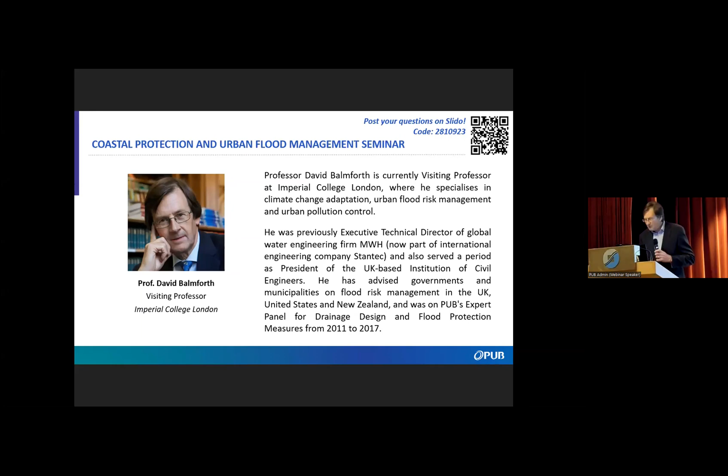I'm going to talk about a completely different area now, which is looking at the places that we live and work, and actually looking at the consequences of flooding when floods occur. I just wanted to start with the 2021 floods in London. Now, you may ask the question, given the fact that we've got a huge barrier on the Thames and a load of flood defence walls, why have we got flooding? Why have we had 3 severe flooding events in 2021? People evacuated from their homes, multiple roads and underground stations closed.

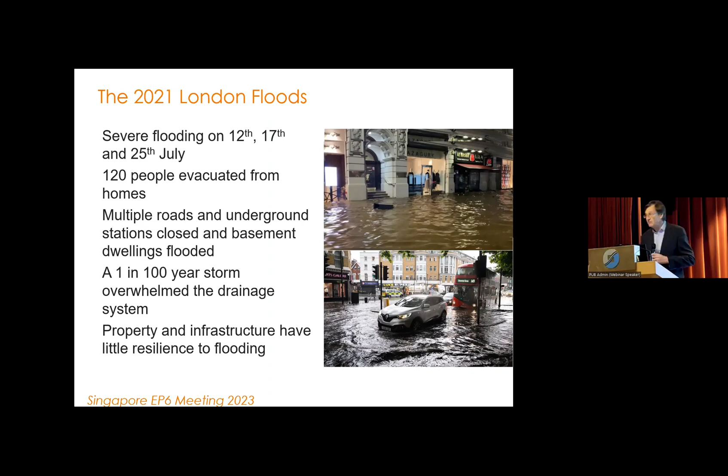And it's because, to some extent, we've been looking the wrong way. And the thing you have to remember is not only do we get flooding from the sea, we also get flooding inland from rivers and drainage systems, and often these two things occur together. In many, many cities, there's a strong correlation between storm surge at the coast and the back up through the estuaries and overloading and flooding from our rivers and drainage systems because it rains heavily at the same time. This was a 100-year event.

And if we just translate that and upscale that for UK, this is some IPCC projections and what it means for flooding in the UK. So at the moment, for all flooding events, we've got probably about 2.8 million properties at risk of flooding. Those are the residential properties, and a further 1.1 million business premises. Now, impacts of flooding can have a lifetime effect on individual people and where they live, and it can put businesses out of business. So it's really, really important, especially for more severe events.

So the next 2 rows are about residential properties that are at risk from severe flooding, and those non-residential industrial properties that are also at risk from severe flooding. And then we've added on some railway stations, lengths of roads, schools, the hospitals. And I just want you to look at the figures on the right-hand side to give you an idea of the scale of the challenge that we face with climate change. Some of the increases, the percentage increases there of flood risk and flood damage are actually quite frightening. And we have to find a way of dealing with this.

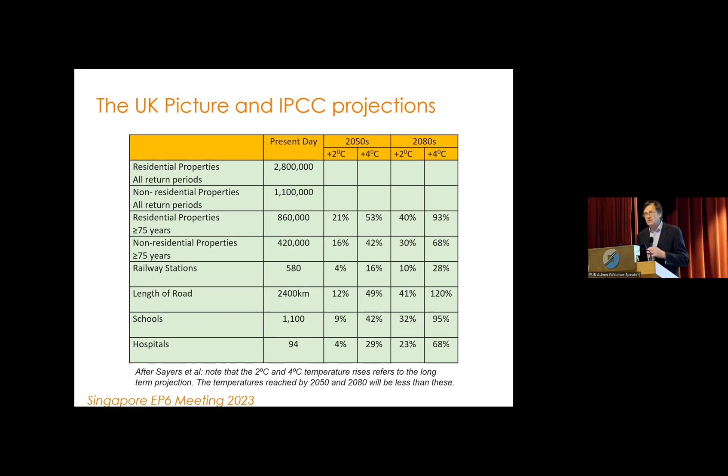Now, we've seen some examples of how we might tackle this risk on the coastal side. And I want to talk about my role in this panel, which is talking about inland flooding, which will be occurring potentially at the same time, and we also have to deal with. And many of you listening today and here in the audience in this building will have some experience of flood risk management, I'm sure, and you'll be familiar with the concept of the source, pathway, receptor approach to managing flood risk. I've just put an example of that up on the picture here in relation to a drainage system, but you could draw exactly the same picture for rivers, exactly the same picture for coastal defences.

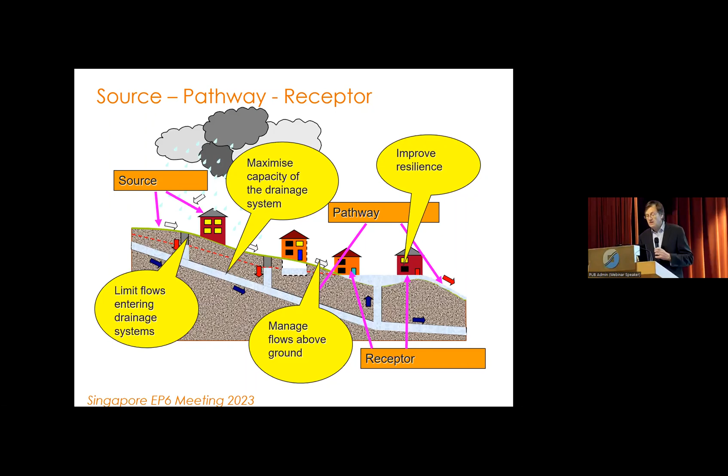But it's really this little bit on the right-hand side, which I hope will work if I press the button. It's that little bit that I want to talk about today. The resilience of the receptor, the resilience of our properties, the places we live and work in, to flooding. Now, we know that we can make these buildings and premises more resilient to floods, that we can attempt to keep floods out and prevent damage so we can continue to live and work in them when floods occur.

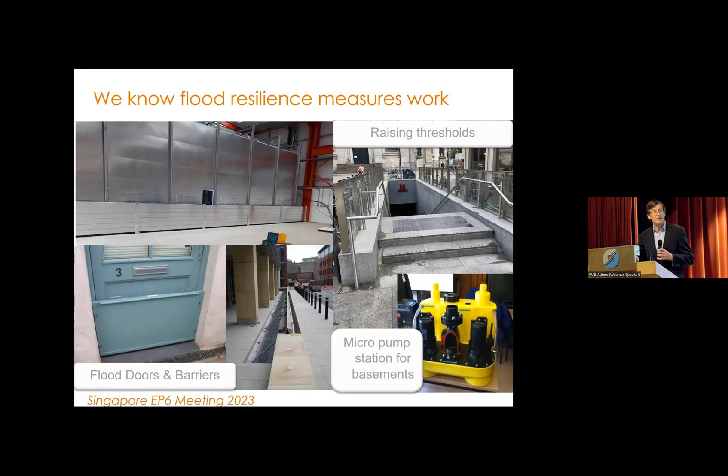We have equipment and products available in the marketplace to provide barriers and flood doors, to provide pumping stations to deal with basement flooding, and also we can raise thresholds generally both on new properties and existing infrastructure and properties to deal with this issue. So we ought to think that we have a great opportunity here to manage flood risk in a different way by making our properties more resilient to flooding.

Because these properties are very susceptible to flooding. They're built from bricks, timber, plasterwork. All of that requires ripping out as it gets damaged during floods and replaced.

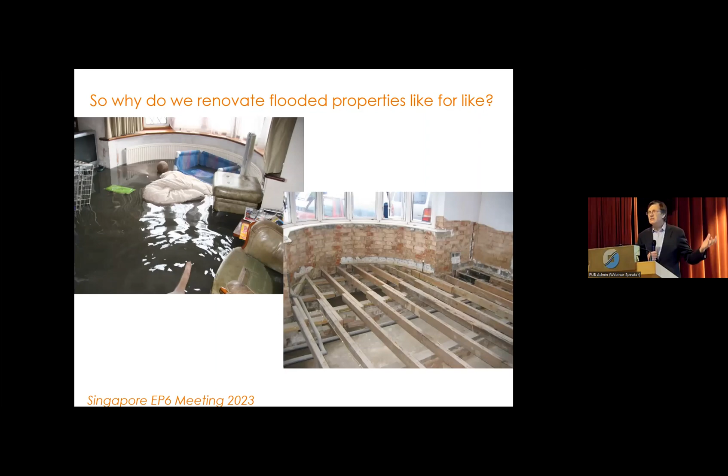We're talking here about people, their lives. We're talking about businesses, business continuity. And it just seemed to me to be crazy that we just reinstated this building exactly the same as it was before. Why is that?

So I started to look into this, and I did a program for BBC television on this topic. And in doing that, one of the places I went to was a property in South London, occupied by a lady called Mary. Now, when I was asked to do this, I imagined Mary was an elderly, frail lady who'd lived in a house and suffered from flooding. She actually turned out to be an ex-policewoman, middle-aged, and actually she looked like an ex-policewoman, and largely she behaved like an ex-policewoman, or how you might imagine a person like that might behave.

Now, her house had been flooded twice. So she decided she was fed up with this, so she would invest some of her savings, a lot of her savings, on putting in flood resilience measures. I visited her after the third time that her house had been flooded. And you can see the damage here. You can see things that have been ripped out. You can see it being dried out.

And when she described her experience with me, this rather tough lady was in tears. She cried while she talked to me about her experience of being flooded. She had spent a lot of her savings to no effect. And I began to realize that the way we were approaching flood risk management, particularly on the resilience side, was not the way that we should be doing it. We weren't dealing with property flood resilience properly.

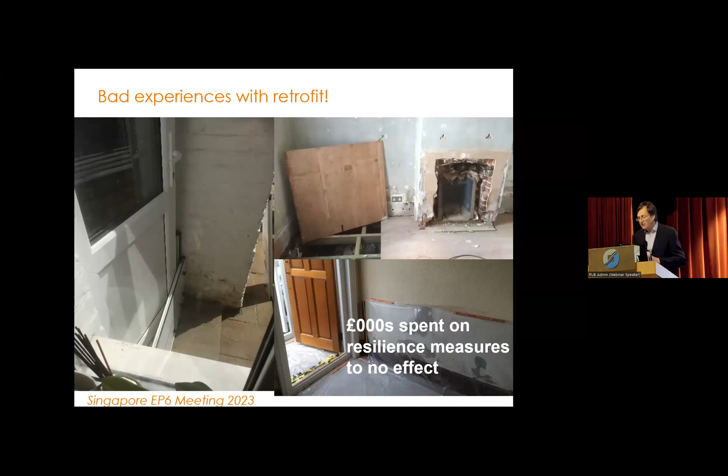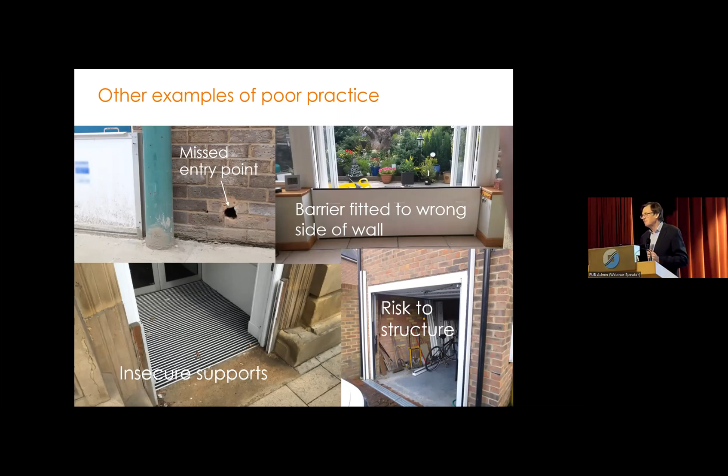Also, when we're flooding, property owners go to their insurance companies, they pay out, the property gets reinstated, but it gets reinstated like for like. Insurers would not pay for betterment. Now, this seems crazy, doesn't it? Because the next time it floods, presumably they're going to have to pay out again. But of course, they allow for that because the one thing you find with insurance companies is they're not keen on losing money. So they will just bump the premiums up. And what happens when we bump premiums up? A lot of people don't renew their insurance. So more people were suffering even more from flooding.

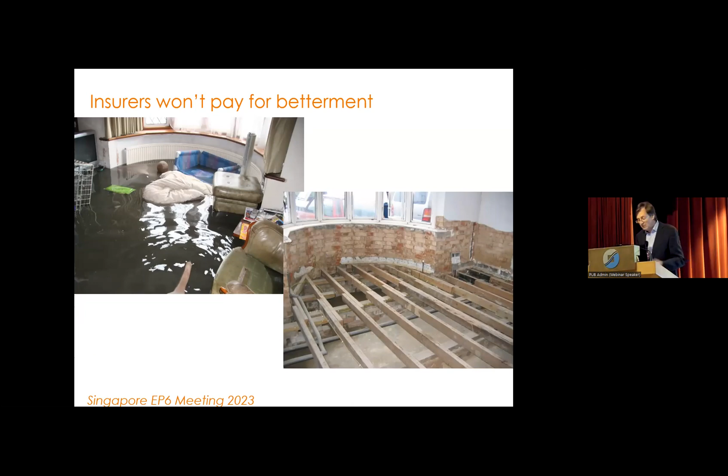Also, because making property flood resilient didn't have a good record, government weren't interested in investing in it. They didn't want to put their money into something that wasn't going to work. It had a bad reputation.

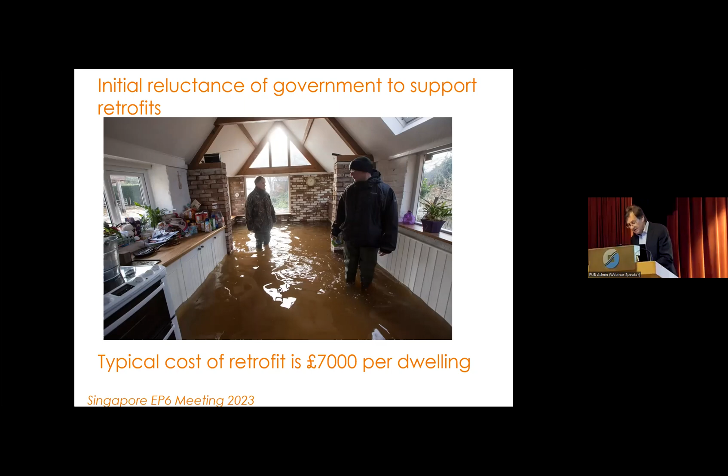And I was told that by our Minister of the Environment at the time, who told me in no uncertain terms during a flooding event, and he was under lots of pressure actually during this flooding event, but he said, please don't talk to me about property flood resilience, I think was his reaction. So I didn't. I went and did something else. I went actually and talked to some of my colleagues in the sector.

I said, come on, guys, please. When I use the term guys, I'm not being gender specific. I'll just be clear on that, okay? All of you.

We got together, we had a bit of a huddle, we had a meeting. It's always good to have meetings, isn't it? It's an excuse for doing something positive, but we had to have a meeting, and we had the meeting.

We got government agencies, insurers, surveyors, contractors, product suppliers, and even some property owners and ordinary people from the street sitting around the table. What are we going to do about this?

We decided we had to establish what good practice looked like, because that was the only way we would then have a means of tackling bad practice. You can't tackle bad practice until you know what good practice looks like. What does good look like? That was our goal.

We had a project, paid for by the government, a research and development project. But actually, interestingly, the biggest financial contributor to this was the insurance sector. We got one of the major insurance companies to underwrite this. They said, get as much money as you can from government and we'll pay the rest.

So they did. Oh, I can see a big 10-minute sign come up at the back there. Just making sure you're giving me the right amount of time.

The first 3 meetings we had, we spent talking about what we meant by resilience in the first place. This was quite important because there's a lot of misconceptions, because resilience is not just about keeping the water out. It's also recognizing that water will get in, and could we perhaps use building materials and finishes and fittings that don't get destroyed when they get wet?

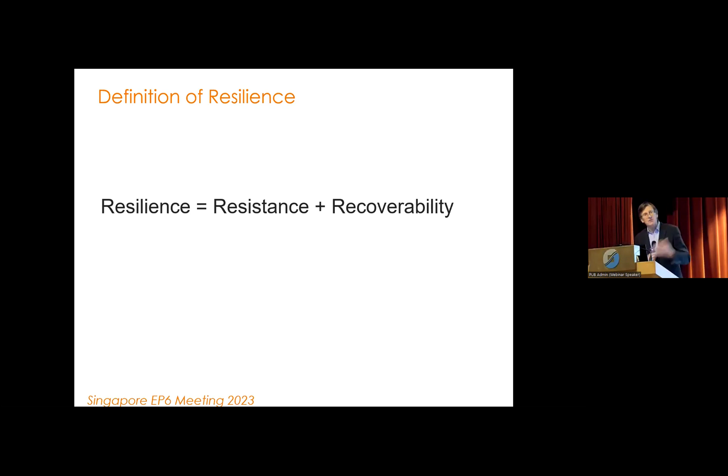They can actually recover. Because what you don't want is, if you have damage to property, you don't want it to take months to repair, because we need businesses to keep running and we need people to get back in their homes. So we developed a code of practice. It took a lot of work, 18 months solid work on this.

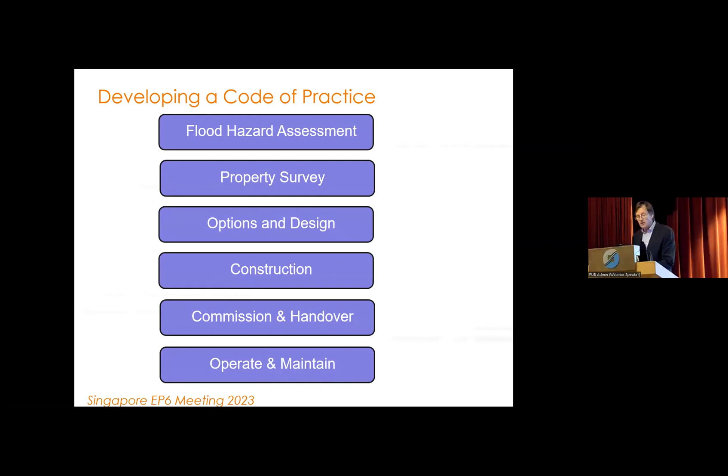These are the different elements. I just want to quickly run through what they look like. First of all, it's really important to find out where the floodwater comes from. It's not always obvious, so that was the first step. Where does the floodwater come from? Source, pathway, receptor - getting into the property.

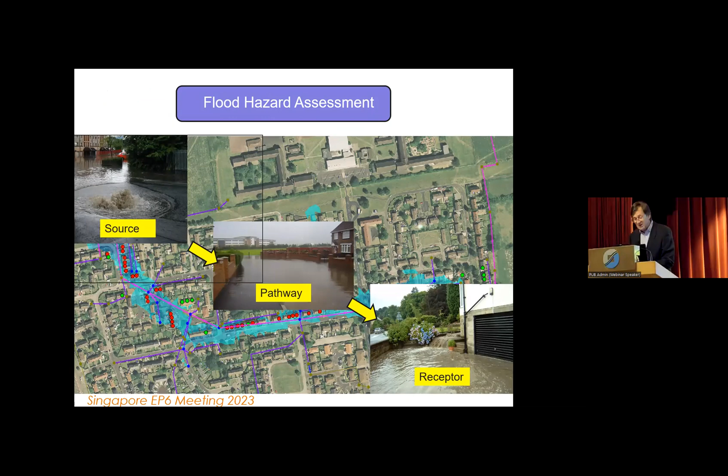Second step, have a really good look at the property. How does the water get into the property? Does it come through the doors? Does it come through the windows? Does it come through the air bricks? Does it come through the drainage system? Does it come through that hole around the electricity pipe? Or does it actually come through the brickwork because it's not been pointed properly? How does it get in?

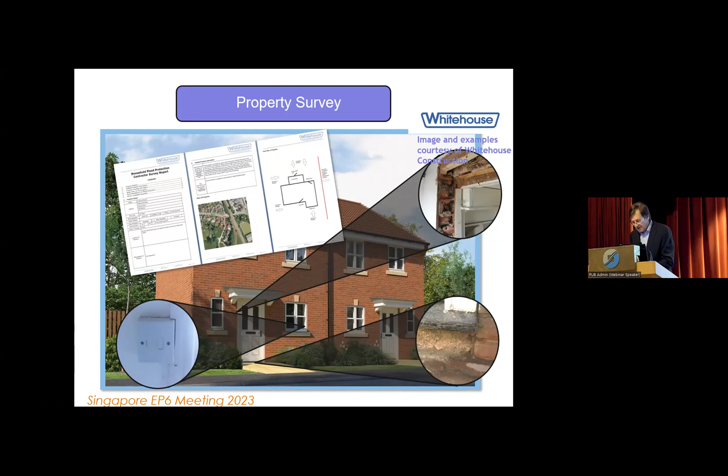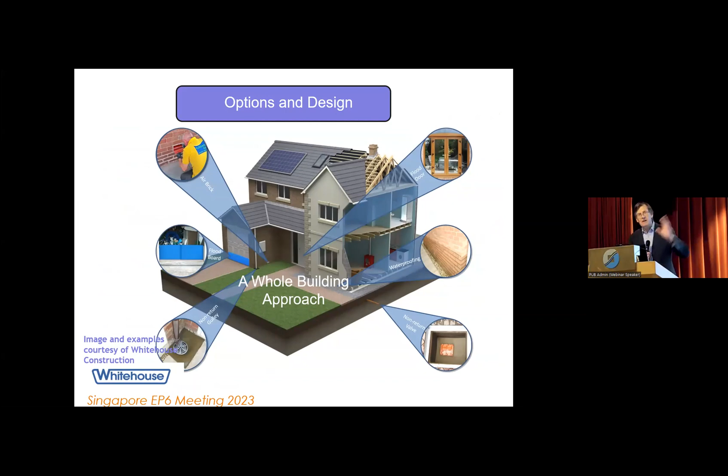That's really important, because you've got to start by understanding how resilient the property is to start with. Then you've got the opportunity to look at how do you then tackle it. I'll show some examples of this in a moment. Where are you going to put the measures? Because you have to have a whole building approach to deal with this.

Floodgates, flood doors - we know these work. They've got to be fitted properly, but are we going to use these? What you have to realize is that water will get past these devices. Almost always, not in every case, but almost always, some water will find its way one way or another into the property, and it's great if that doesn't build up. You only need about 300 millimeters of flood water in a property to cause substantial damage. So a sump pump is really good at managing that.

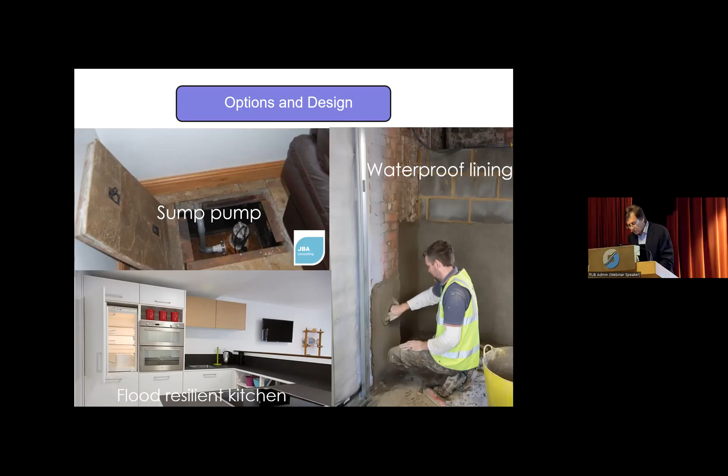And then look at waterproof finishes, waterproof linings on walls, waterproof fittings, particularly water resilient kitchens. Kitchens are really expensive to replace, but use water resilient fittings on there. Also in industrial and commercial premises - this is an example of the Environment Agency's properties in Carlisle, which gets flooded from time to time. Glass panels, really easy to clean down afterwards, very durable.

Carpets - low-cost carpet tiles are the best way, because you just pick them up and throw them away and put new carpet tiles down, since you do that periodically anyway. Lightweight furniture you can move out of the way with the flood warning. Don't plaster the walls, you paint them. Use a membrane to reduce water coming into the building, and put the electricity up at a nice high level so that doesn't get damaged.

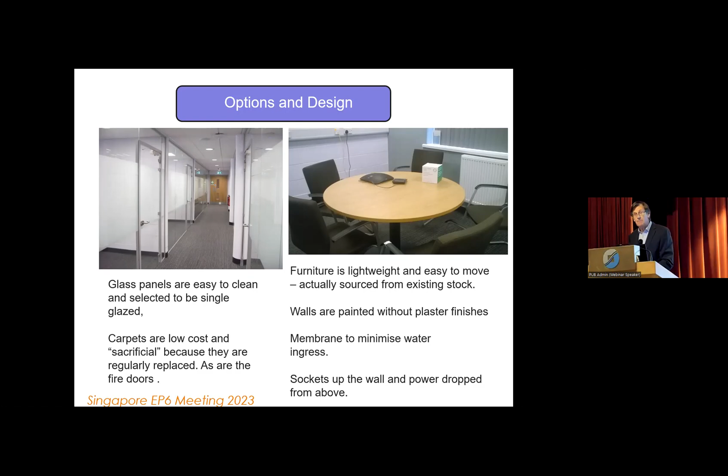They just keep going. They can have a flood, they shuffle around for a day or so, and then they're back in business by the end of the week.

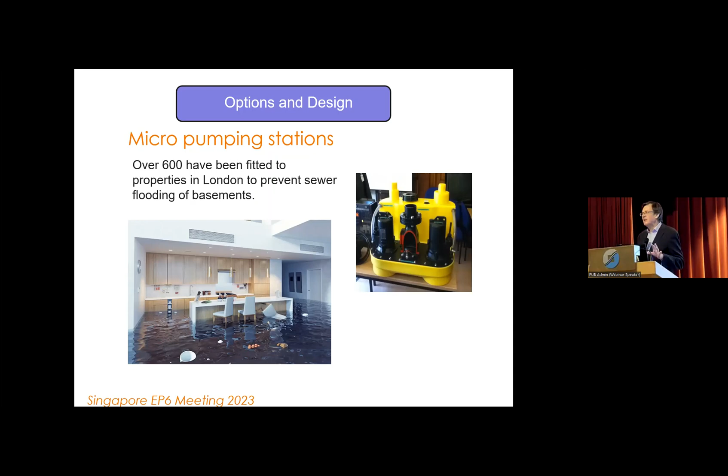A lot of work done on the drainage system in London, particularly basement properties - retrofitted pumps, which basically isolate the drainage from the rest of the drainage system, and then pump it back into the sewers. This stops levels backing up and flooding the properties. So all your basements, really look at carefully - you can isolate them from your drainage system and pump them back.

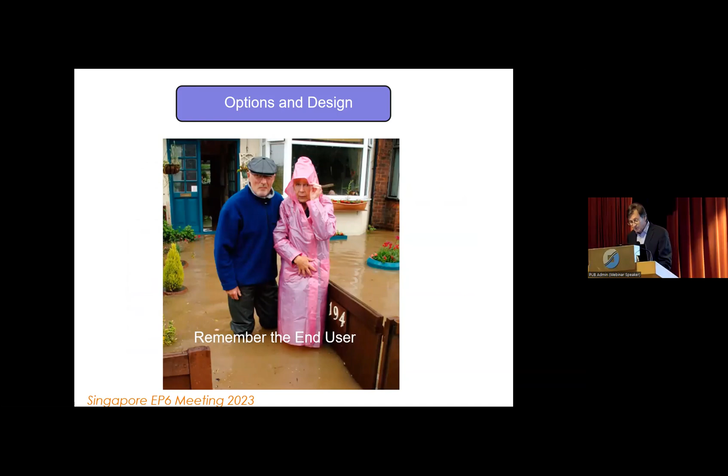And the last point about options and design: remember, people have to occupy these buildings. Understand the people who are going to occupy it, because they have to live with the measures you're going to install. These people are really unhappy when they've been flooded, but they're really chuffed when we've finished doing the property resilience.

Delivering: get a good contractor, somebody who's experienced. Clearing out and drying out the building is really important. It needs to be done sensitively. Don't just throw everything away, because some of those damaged items might be recoverable.

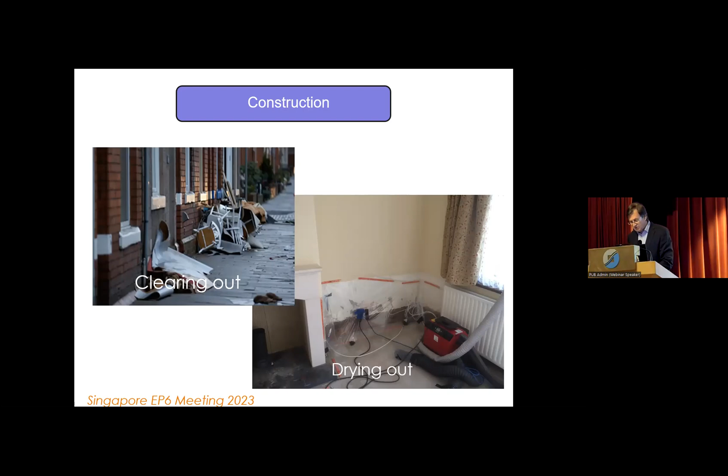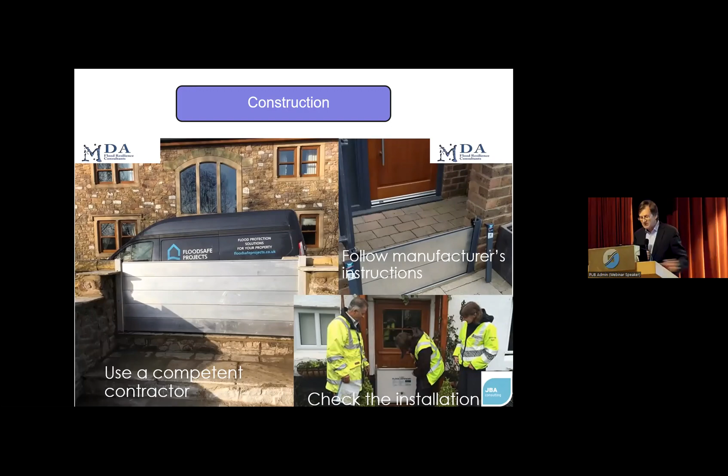Use competent contractors - here's one for you, isn't it? Follow manufacturers' instructions - you know that little bit of paper that comes out of your appliances that you never read and throw in the bin? Well, please don't do that if you're putting in property flood resilience. Find out, check the installation afterwards, make sure it's been done properly.

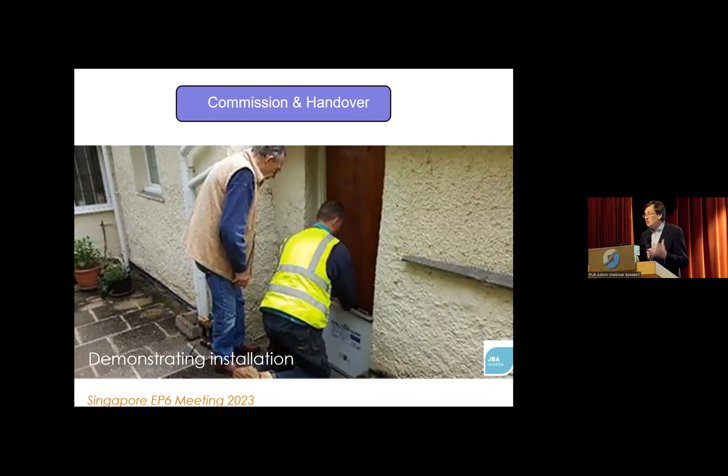Work with the homeowner, the property owner, the business - demonstrate the installation, make sure they know how to use it, where they're going to store it. And there needs to be an operational maintenance manual. Make sure that's done regularly so everything works when you really need it. Practice the installation. A quick summary on how successful this has been.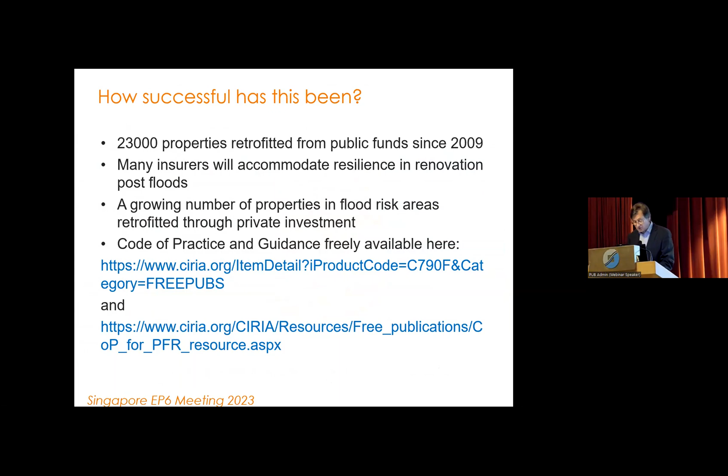23,000 properties fitted since 2009 with government support. Most insurers now accommodate Build Back Better. A growing number of properties in flood risk areas are being retrofitted through private investment, and the code of practice is freely available - I've included the website so you can download it yourself. Always nice to get something for free. And there's some summary information available for those who don't want to flog through the whole guidance.

Just to finish with some examples of success. On the left-hand side here is a basement property in London, a very fashionable area, expensive basement property, protected by floodgates, but behind the floodgates are two sump pumps. They pick up anything that gets through the floodgates, the flood barriers.

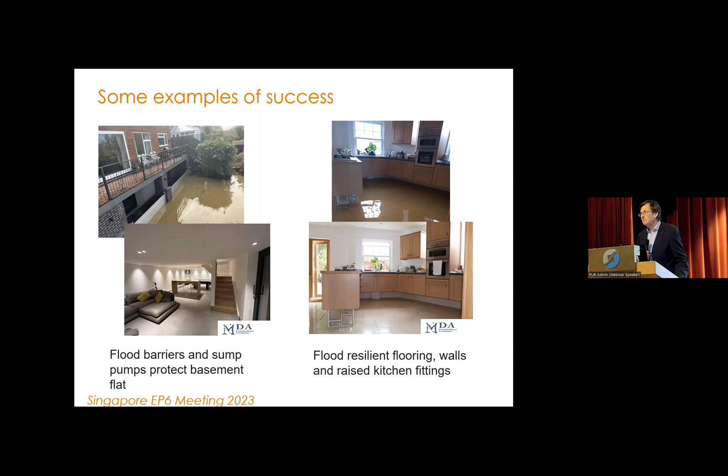The one on the right has a big reliance on flood resilient fittings. So a very nice modern kitchen, entirely flood resilient - you can see it flooded in the top picture there. It takes, after the flood subsides, about an hour to two hours to clean it all out. Very easy, nothing nasty left behind, easy to disinfect.

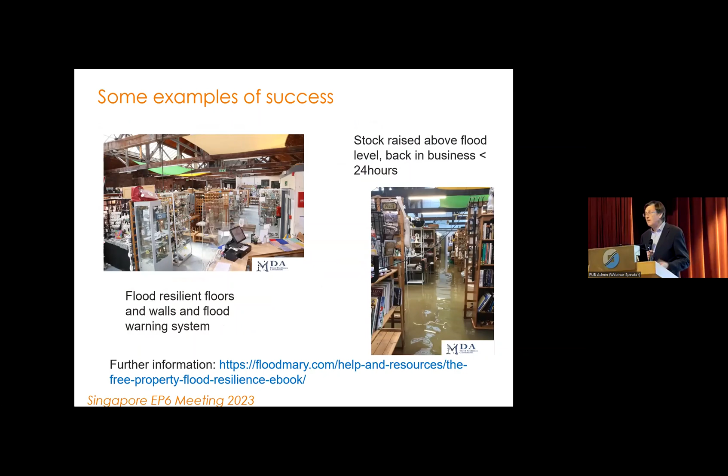And this is a bookshop in a small village in the Pennine area, north of England - a bookshop, a hardware place. This has flood resilient floors, lightweight finishes, flood resilient walls. It does flood - flood water gets into this premises, but within a day or two they've got it cleaned out, back in business again. Business continuity, really, really important.

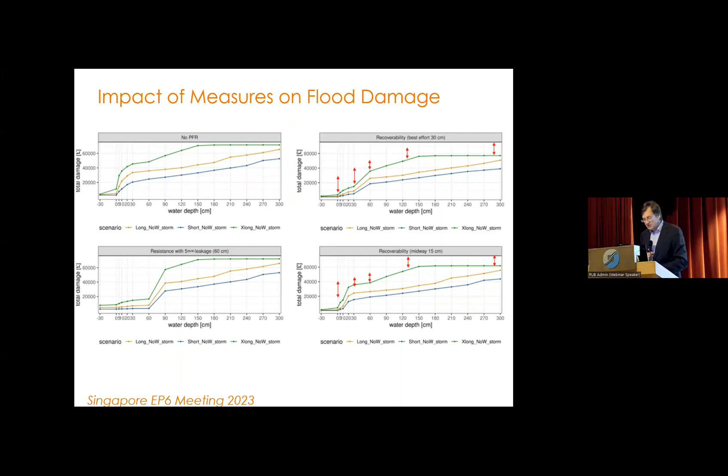We are starting to quantify the reduction in damage - it's starting to come down. So the left-hand side is the top left, what the damages are without resilience measures, and you can see how that damage rises very, very quickly at low depths and then levels off. If you look carefully, you can see that the resilience measures on the right are addressing the early part of that, but will only address it up to a certain flood depth. Once you get past about 600-700 millimeters, 800 millimeters flood depth, then defenses get overtopped, water gets inside, and you start to climb back. This is why the recovery measures are so important.

I just wanted to finish with the final picture, because actually what is behind property flood resilience is a fundamentally different approach to managing flood risk. Traditionally, all our approaches to managing flood risk have been about reducing the occurrence of flooding - flood defences, increased drainage capacity, managing rivers is all about reducing the probability part of flood risk. What we're looking at here is reducing the consequences of flood risk.

And that still provides the opportunity, either completely or in concert with probability measures as well, in just getting down to the right risk level - enabling businesses to stay in business, enabling people to live comfortably in their homes, and also to enable us to have affordable insurance.

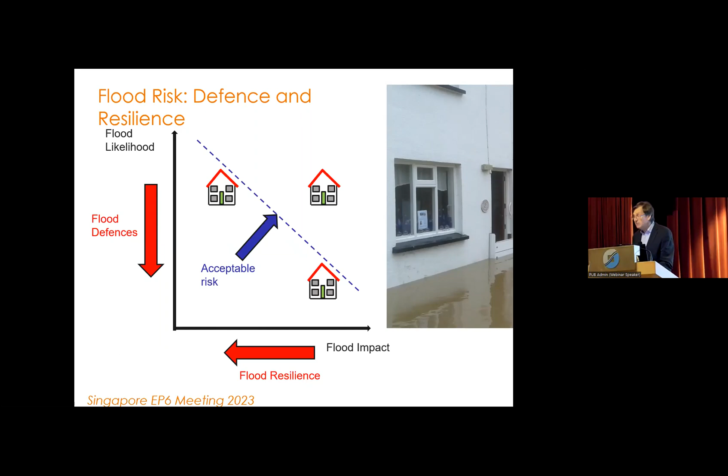So my conclusions are: the code of practice establishing what good looks like has given confidence to stakeholders and the public. It's allowed government to give grants for retrofitting resilience measures. Insurers have agreed to Build Back Better, so flood insurance is now affordable for properties with resilience measures. We're getting training schemes in place.

They're in place now to make sure that contractors and design engineers know how to deal with these new methods, can get installation done properly. We've still got work to do on introducing a certification scheme and quantifying the benefits with hard evidence. But we've come a long way from the situation we were in when Mary decided to spend some of her own money on resilience measures. Now we know how to do it well, we do it well, and this gives another big element in the toolbox of managing flood risk. Thank you very much.